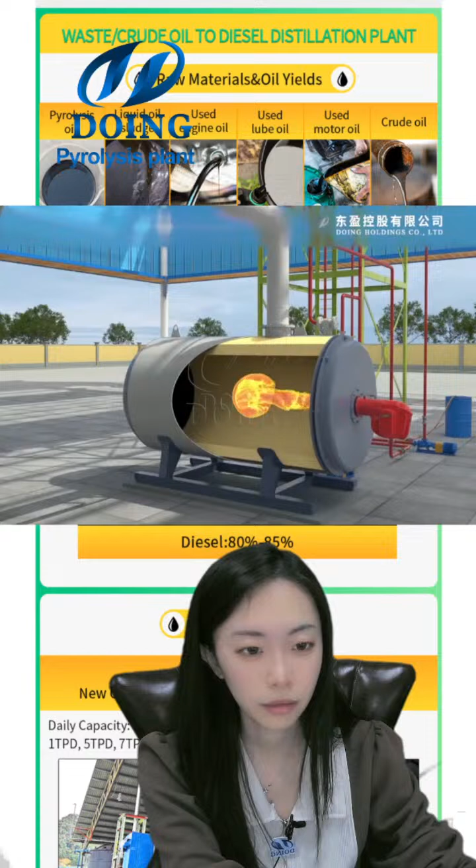The conduction oil furnace is equipped with a 400,000 calorie burner to heat the conduction oil. This is the circulating water system that will liquidize the oil. This is the reactor, equipped the same as the furnace with a 400,000 calorie burner and a tail gas burner. The gas will then come out.

The uncondensable gas will return to the furnace for heating. It will be used to heat the reactor.

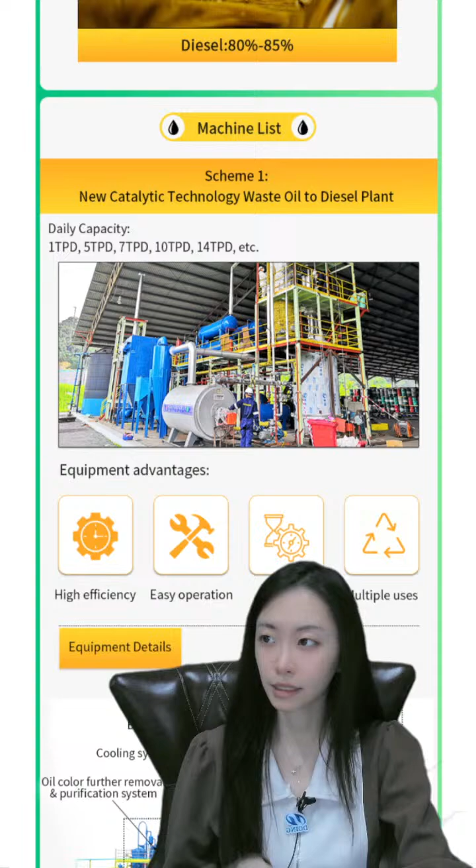We have two kinds of distillation technique. The first is the new catalytic technology waste oil to diesel plant. The second is the cost-effective waste oil distillation plant, which uses another technique. We'll show the differences between these later. The old one uses acid and alkali, and the new one uses catalytic technology. It's kind of different, we'll show you later. Now let's talk about a brief introduction to the distillation plant.

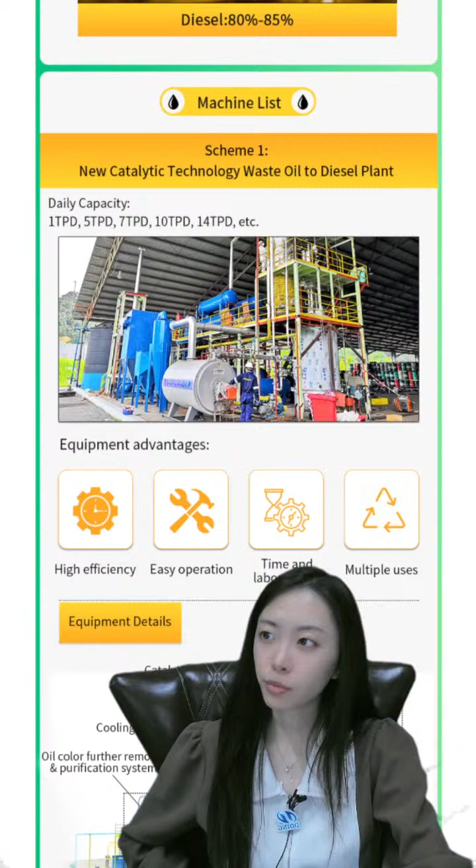We use high speed heating for the double heating system, so the heating time is about 20 minutes, giving high working efficiency. We also equipped it with a PLC system for automatic control. Because of different kinds of oil, you can use the same distillation plant.

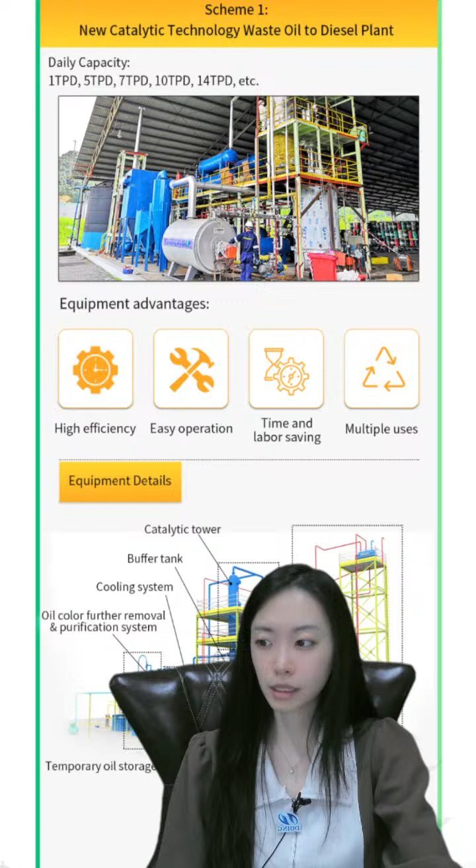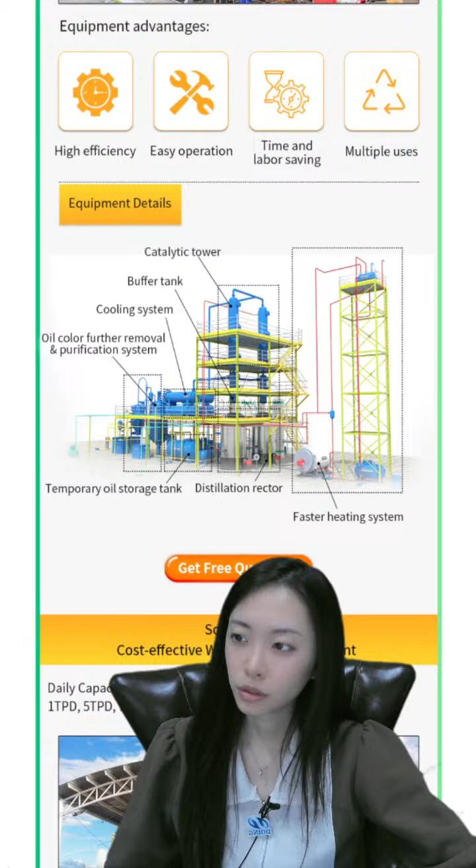This is the details of our technique, you can see the 3D layout. It includes the faster heating system, and we use conduction oil. Then there's the distillation reactor - we have two reactors to refine the diesel, then a buffer tank to slow down the speed, and a catalytic tower for the reaction. If you need a larger or smaller one, you can contact us.

We have different types. The smallest one is a frame type. It's very easy to install and doesn't need to be installed in your workshop - you can just transport it to the workshop and start the business right away. This one is cost-effective, easy to install, energy-saving, with frame construction.

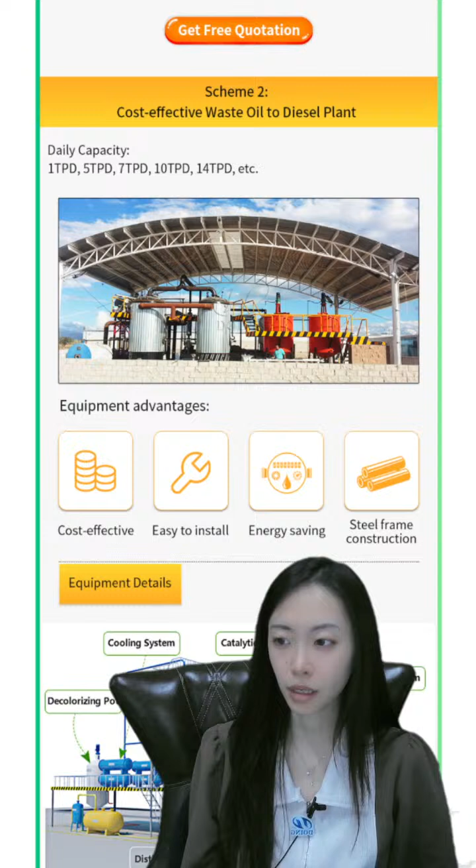We also use the catalytic, but the catalytic may be kind of expensive. So it just depends on your requirements, your materials, and the region where you start this business. We will suggest a different type for you. This is the details of the equipment, almost the same.

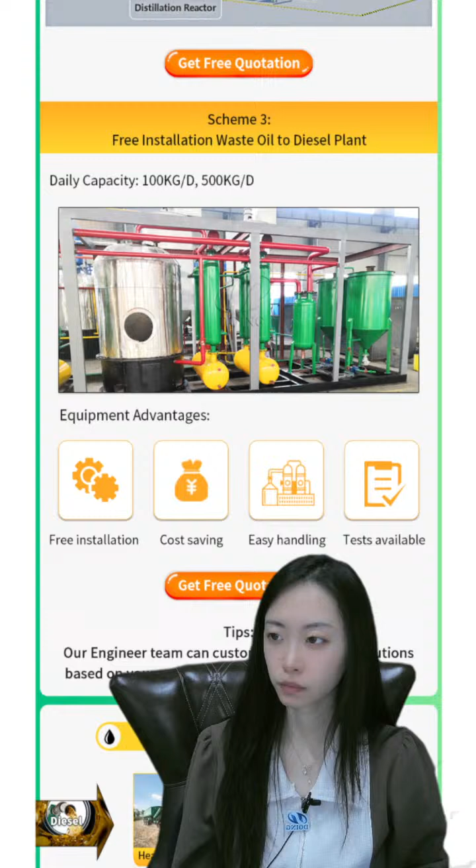And this is the third type. It's cost-saving, the cheapest equipment, and easy handling for testing available. So some experimenters or some colleges will buy this just to run experiments or tests on the oil.

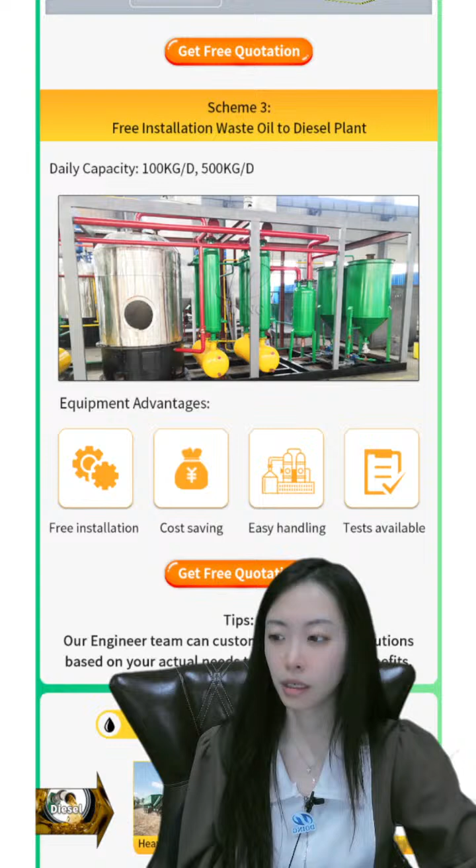So you can see this tip - our engineer team can customize a proper solution based on your actual needs to maximize the benefits of our equipment.

The main final product is diesel for heavy machinery, generators, boilers, and the second is asphalt for paving or refinery. Let's look at the profit analysis of the 5 ton per day waste oil to diesel plant.

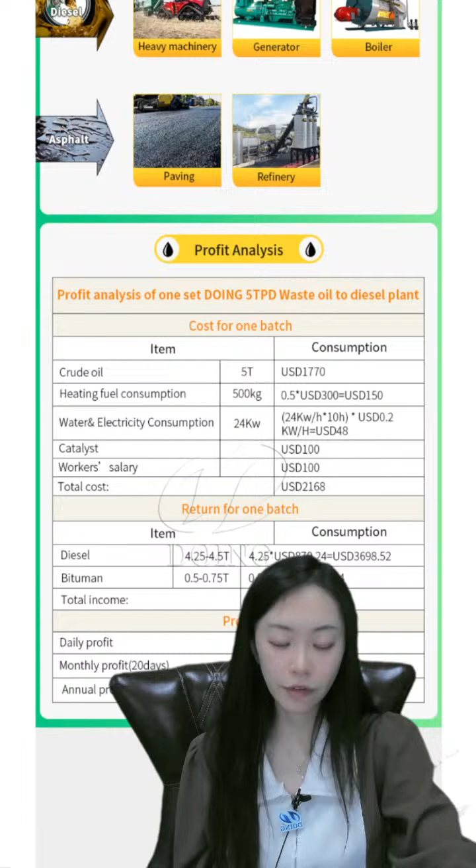This is just for reference, because we have different customers in different regions and the prices are different. We kept this to show you, so you can have a reference.

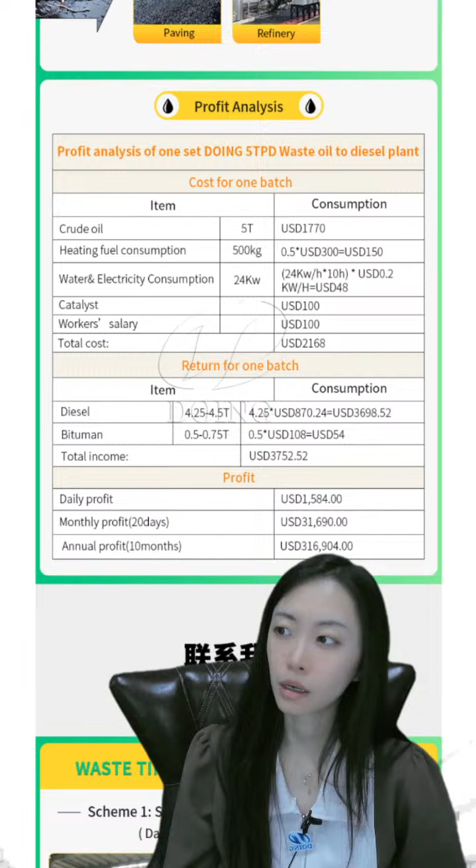The catalytic type is much more expensive, but you can buy it in the local market. This is a small scale distillation plant, scheme 1, the tire plastic plant and the distillation plant - we have 2 types for your requirements.

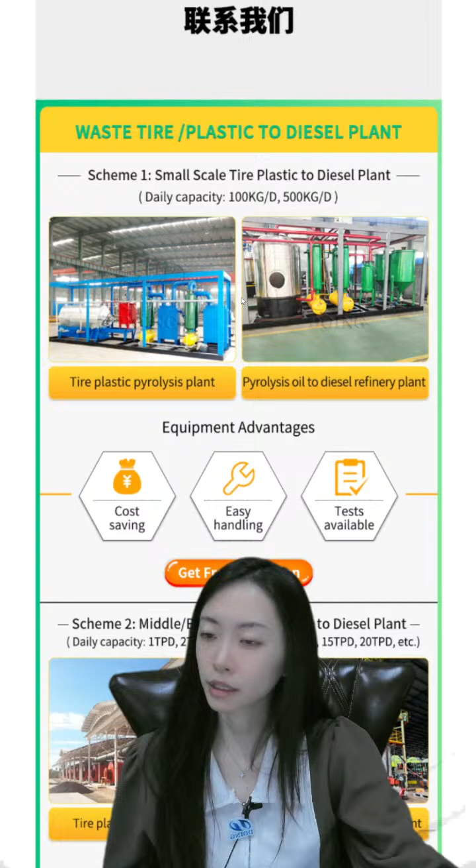This is a customer's plant that we delivered to England. We have customers in more than...

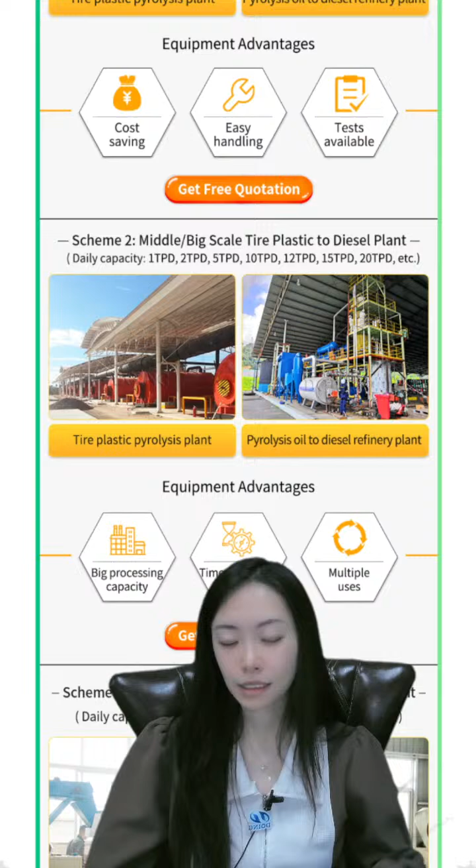This is a middle or big scale plastic to diesel plant. The daily capacity is 1 ton per day, 2 ton per day, 5 ton, 10 ton, 12 ton, 15 ton, and 20 ton. It has a big processing capacity, and is very time and labor saving with multiple uses.

By the way, we processed this plastic into plastic pyrolysis oil a few weeks ago, and there will be more maybe next week.

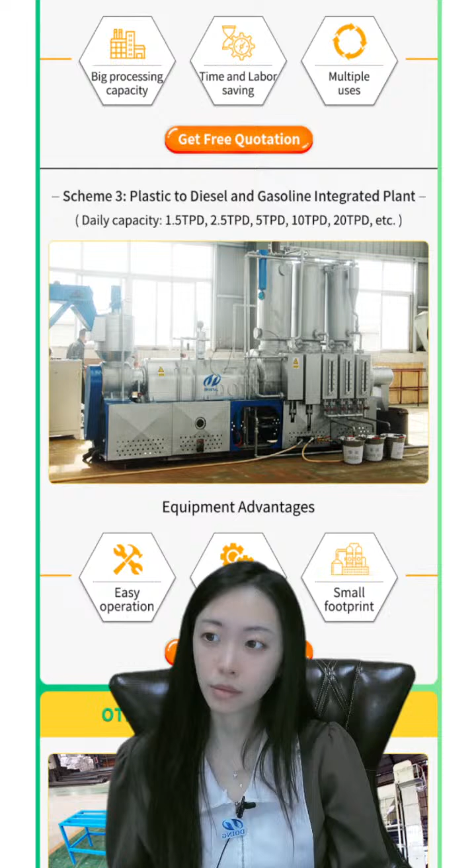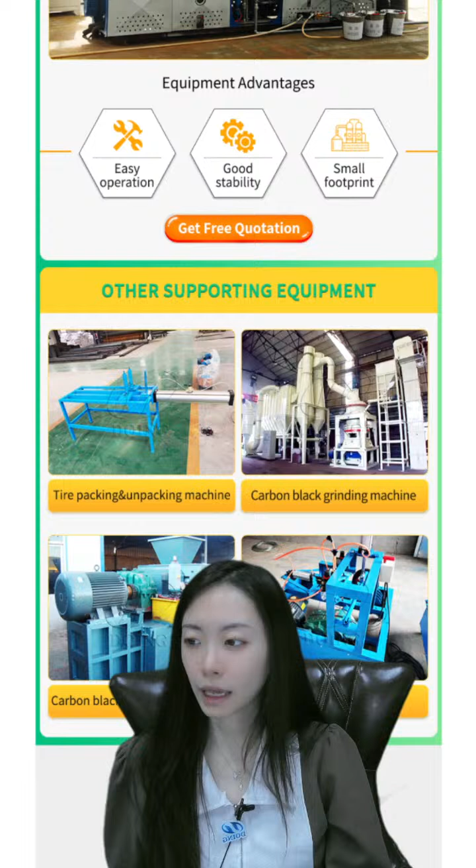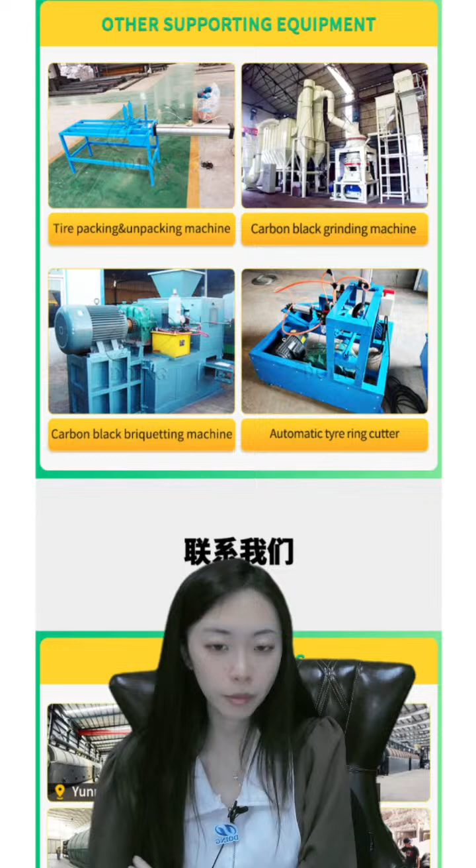The tire ring cutter first cuts the tire into small parts, small particles, and then we use a grinder to process them.

In Africa and abroad, in more than 90 countries we have our customers. So it's very convenient for you to visit our project cases and get a detailed understanding of this, to know how to control the type, our quality, our working efficiency, and so on.

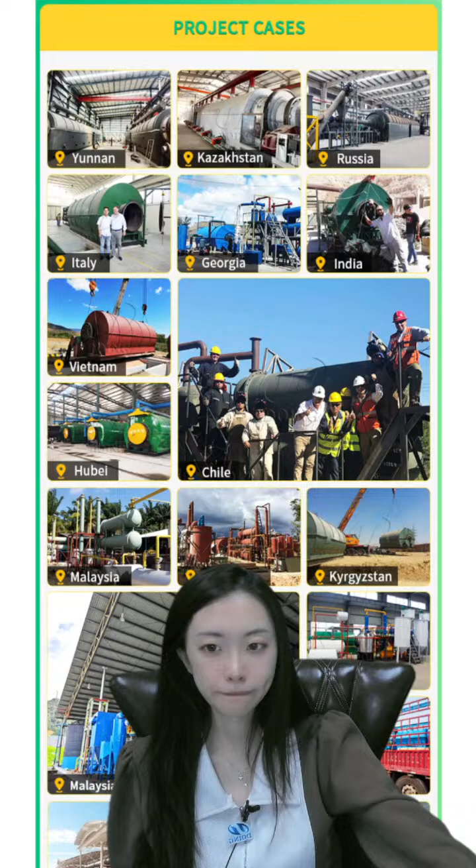Here is a customer feedback. A customer in India gave good feedback to our engineer, who was hardworking and completed the whole installation work in only 20 to 25 days - a successful implementation. And this is an American customer putting trust in our helpful, competent sales agent.

Okay, let's come to see the profile of our company. We are a comprehensive environmental equipment manufacturer, integrating technological design, research and development, machine production, sales, and after-sales service in one. We rely on excellent technology R&D strengths and innovation spirit. Our company has over 23 utility patents, and is honored as a National High Technology Enterprise by the Science and Technological Commission. Our main business covers solid waste and hazardous waste equipment, dealing with tire, plastic, oil, and sludge.

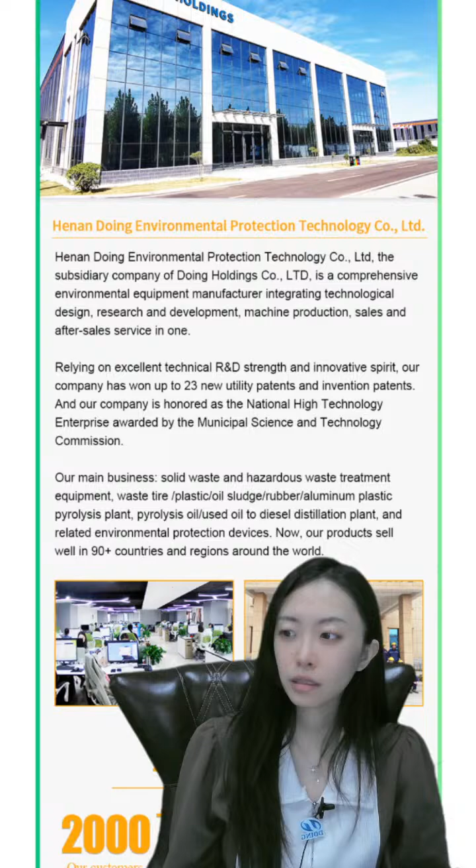Today we're going to share about waste tire to waste pyrolysis oil plant and pyrolysis equipment. Here is our service.

We have pre-sale service, on-sale service, and after-sale service in one. For pre-sale service, you can visit the factory production workshop for one-to-one equipment configuration planning, and visit the equipment placement site. You can directly gain knowledge of the detailed technique, and we often show our product cases to see the details of the production line.

On-sale service includes checking the production conditions of the machine and communicating the progress of equipment manufacturing. After-sale service includes a 1-year warranty and guidance for equipment installation and commissioning, along with final technical installation and working support.

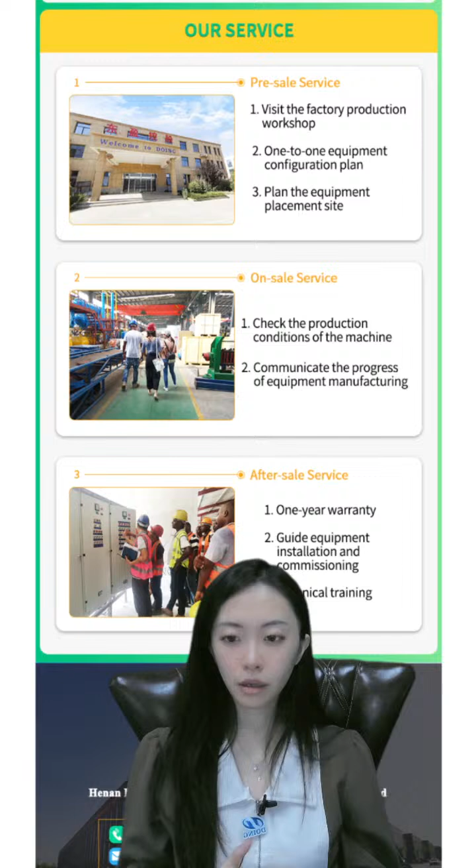Okay, let's see the differences between the different distillation machines. We have two types. This is the 3rd generation, the most common type now. The new design uses the catalytic tower design, while the old one uses acid and alkali. Let's look at the advantages and disadvantages.

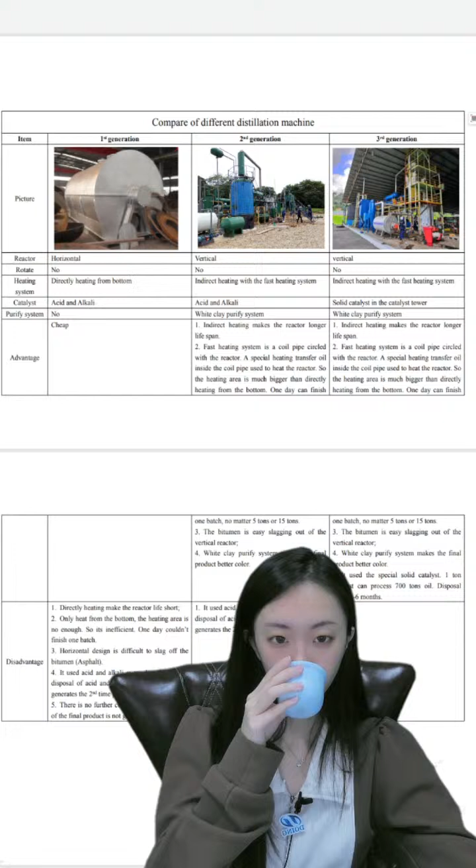The horizontal design is also difficult to slag off the bitumen, the asphalt - also called asphalt - so it's very difficult to clean. They use acid and alkali every day, so there is disposal of acid and alkali sludge daily, which generates second-time pollution. So we developed the second generation.

It uses vertical reactors, so indirect heating makes the reactor have a longer service life. The heating system is a coil pipe circulating around the reactor, bigger than direct heating from the bottom - this is why we use vertical reactors, not horizontal reactors.

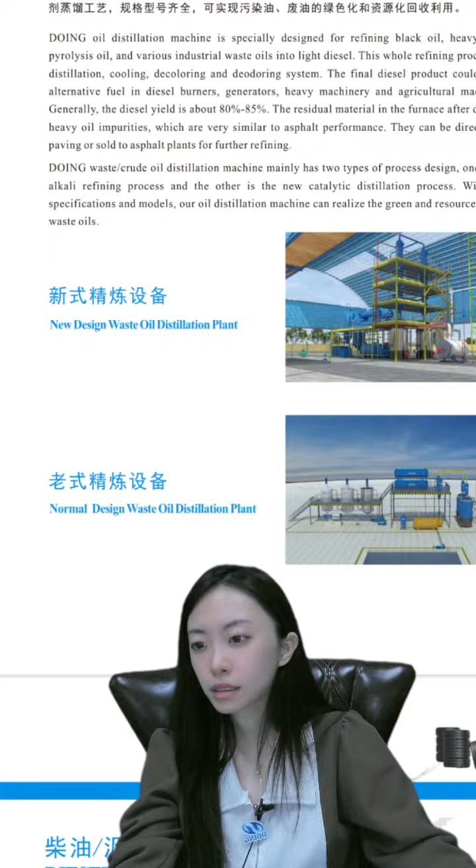Let's see about this. We can send this catalog to you, or give you the purification plant or the 3D layout, the layout of the reactor.

Here is the brief introduction of the distillation plant, a special design for refining black oil. This whole refining process includes distillation, decoloring, and the deodoring system.

The final diesel product could be used as alternative fuel in diesel burner generators, heavy machinery, and agricultural machinery, and so on.

Generally, the diesel yield is about 80 to 85%. Our distillation machine mainly has two types of processing design: one is the acid-alkali refining process, and another is the new catalytic, solid catalytic distillation process, which is much more

safe to have this production, and there is no second pollution during the production line. With a complete purification system, our distillation machine can realize the green and resource recycling.

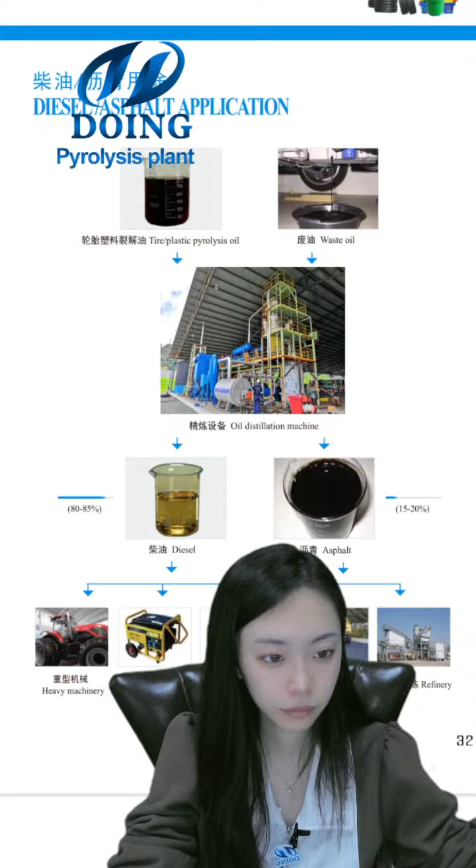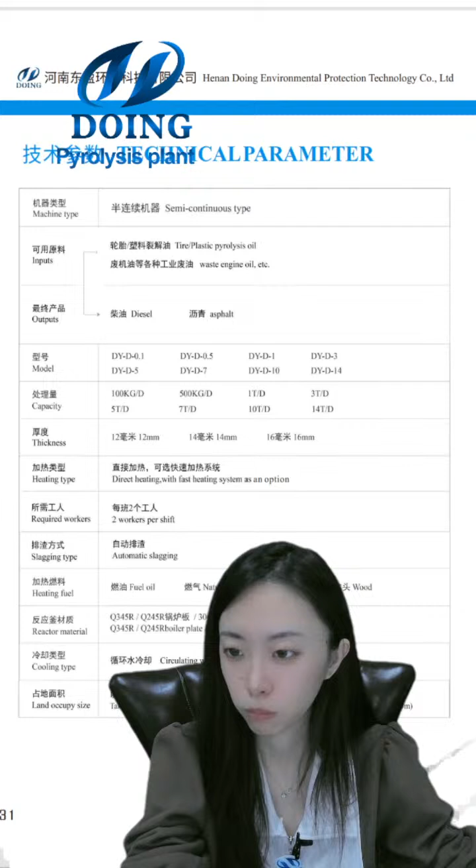This is the semi-continuous type, a smaller one, and it can be customized. The capacity is just the same as the model, and for heating type, we use direct heating with a fast heating system.

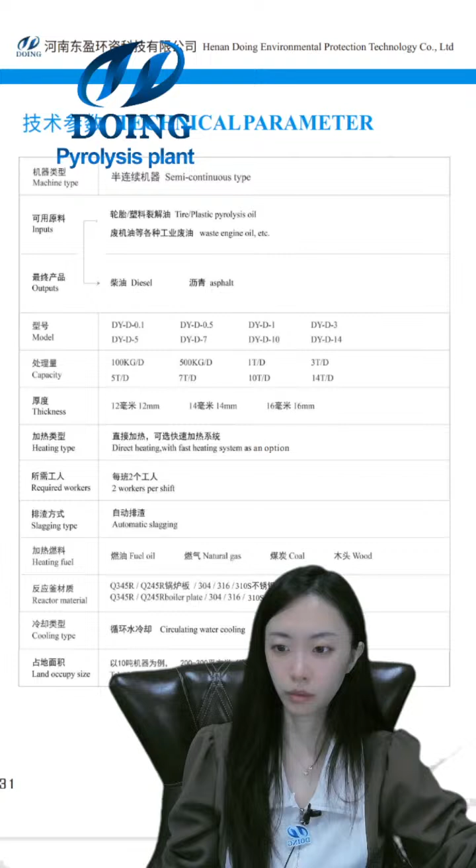This is an optional device, whether you use conduction oil or not. The heating flue can use natural gas, coal, or wood.

For land occupation size, it's maybe 200 to 300 square meters, with 10 to 15 rows and 20 to 25 lengths.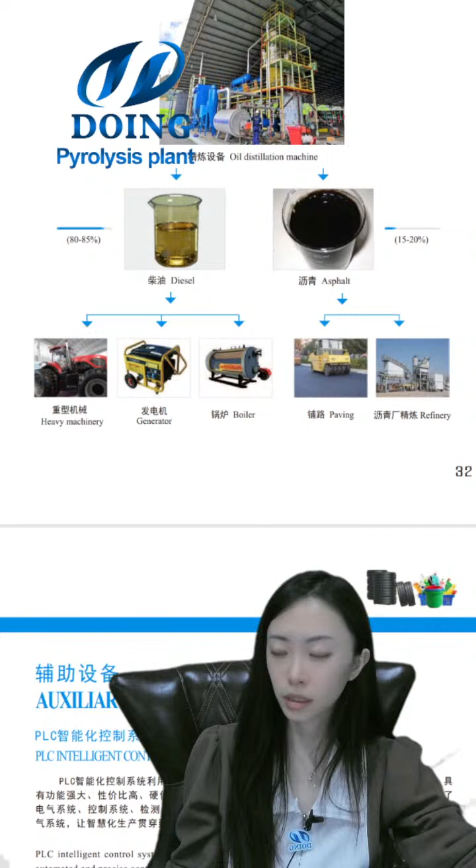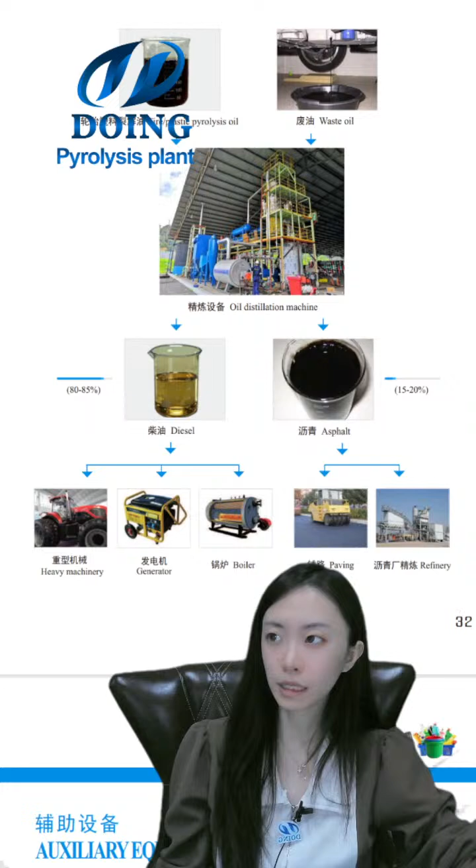This is the application of the diesel. We can use it in cars, but most of the waste oil quality can't reach the quality to use in cars.

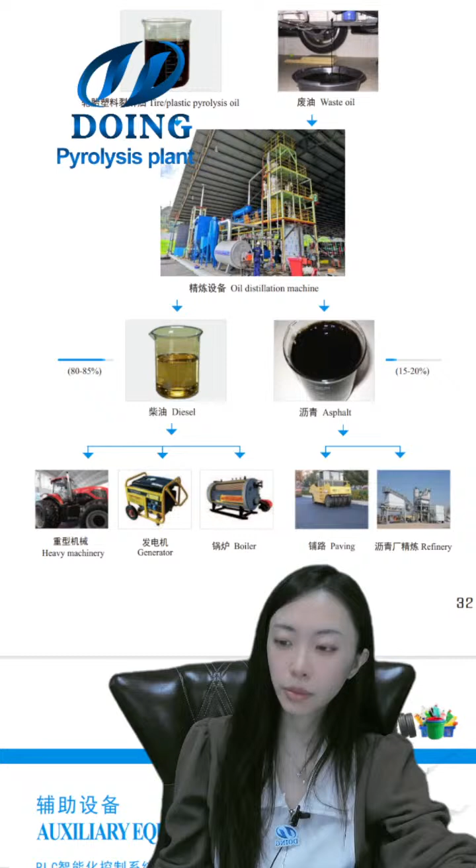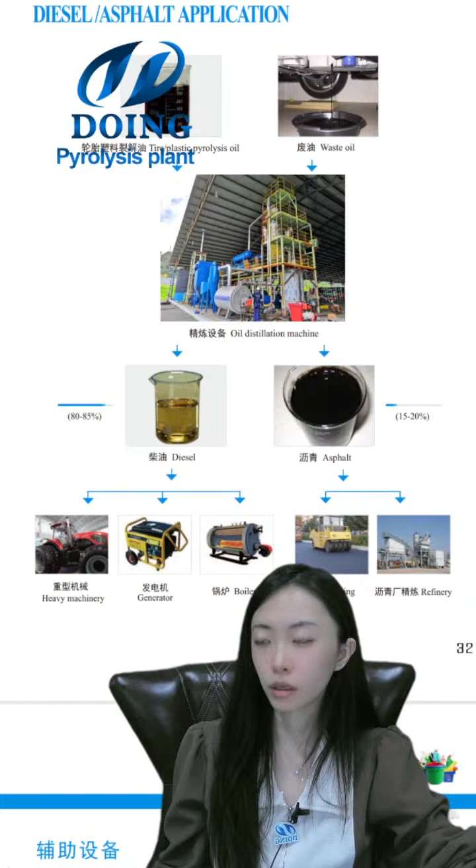And this is the distillation plant. We also have our pyrolysis plant to get.

For the pyrolysis plant, we have three types. The batch type pyrolysis plant.

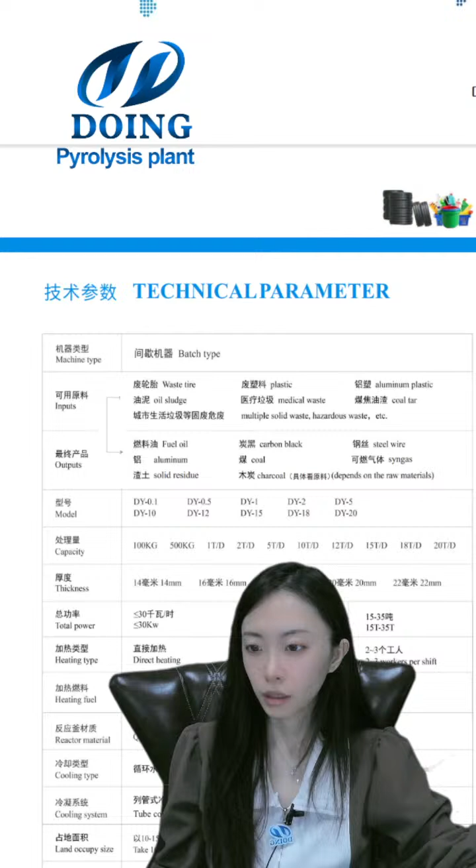This is the batch type pyrolysis plant. We have three types of pyrolysis systems.

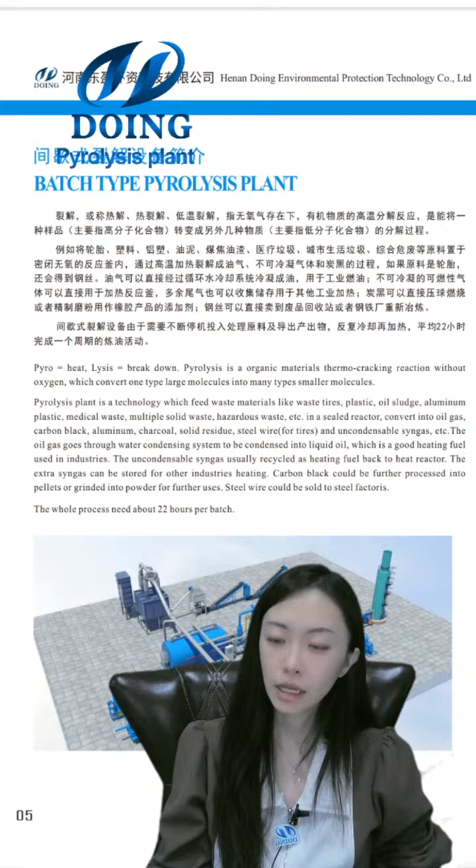The batch type is one batch per day, and the second one is the semi-continuous pyrolysis plant, which has 3 batches for 2 days, for different raw materials, different requirements, and different capacity.

The fully continuous one is the highest, more larger, and can process more raw materials every day. The biggest capacity is just 50 tons per day.

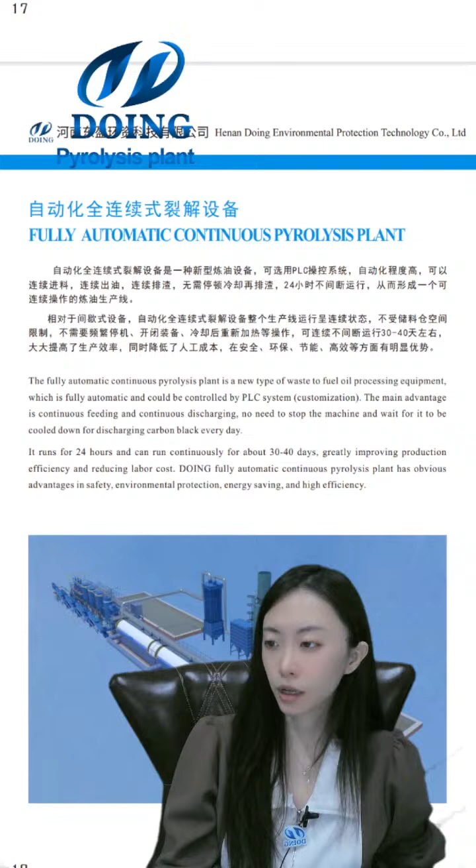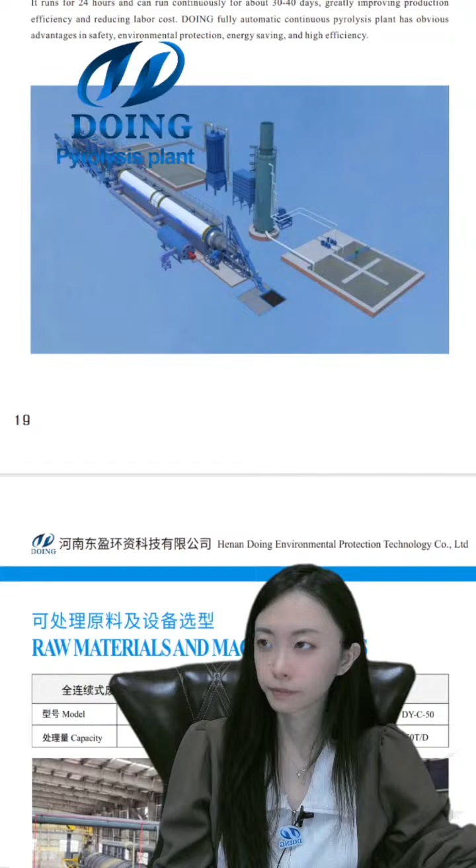Okay, and let's see the 3D video of the pyrolysis plant and the distillation plant.

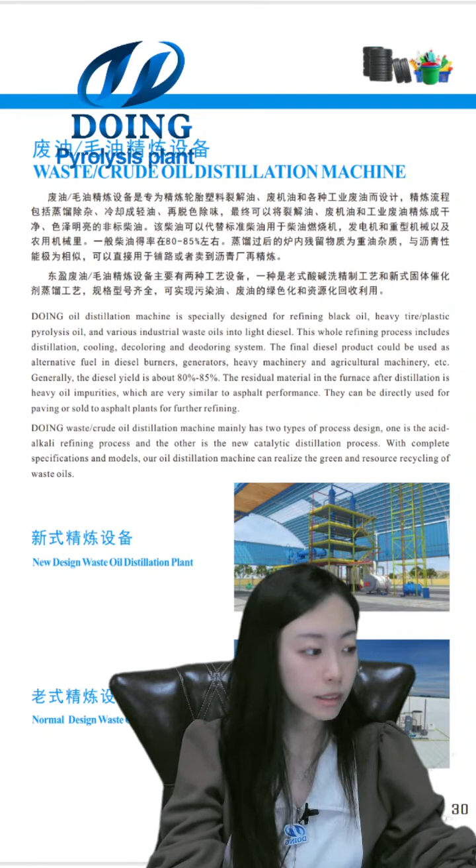Okay, here is the distillation plant 3D video, very beginning.

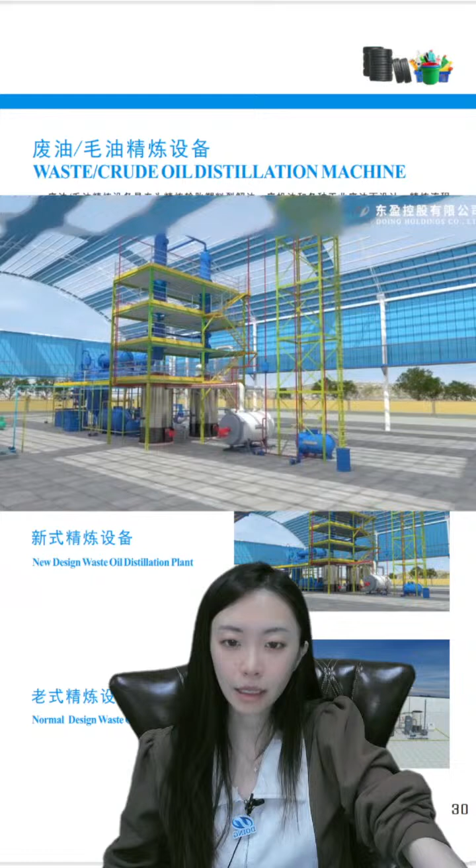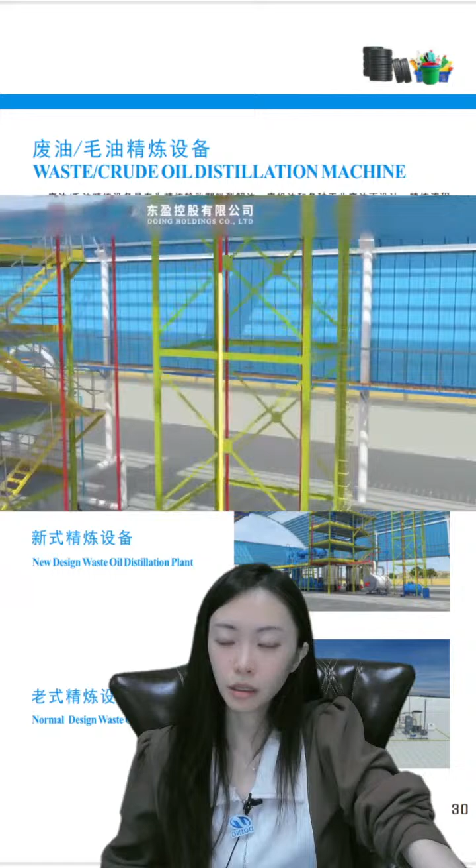The new distillation plant uses a catalytic process, and we will use the double heating system. The heating time is about 20 hours. The fast heating system can save nearly 10 hours by using this conduction oil.

This just goes through the high tank, while the high tank is used to give the oil impulse that can first go to the whole production line.

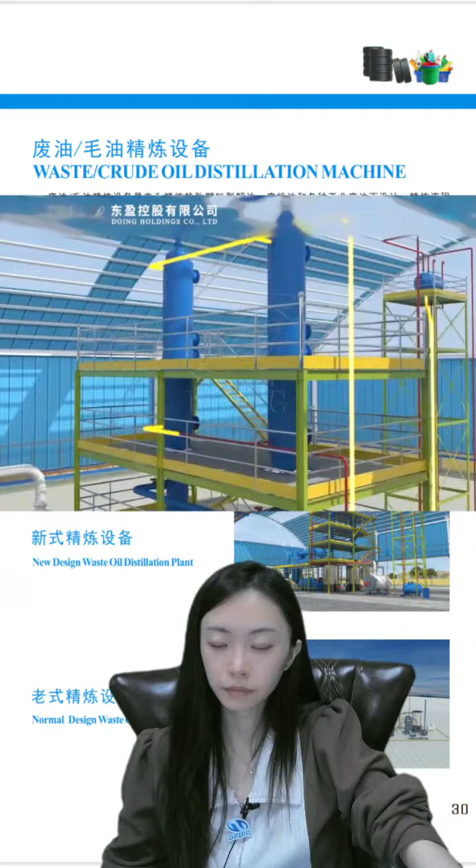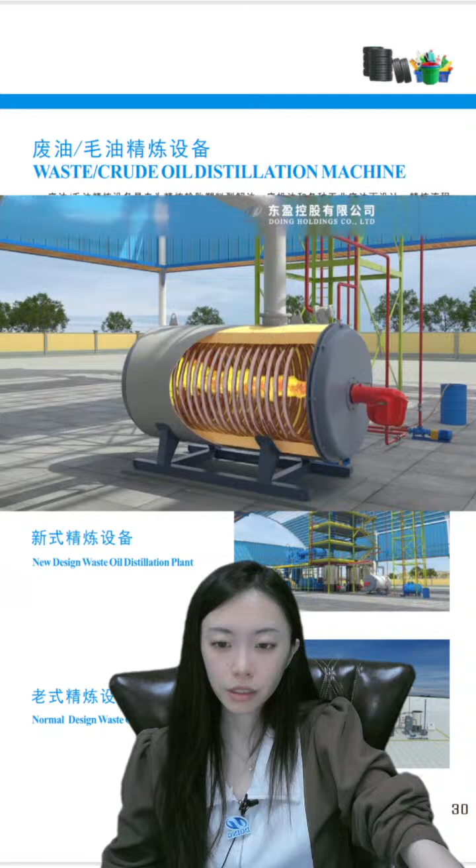The conduction oil will first reach the reactor. This is the conduction oil furnace to heat the conduction oil heating cooling system, so there is no water pollution during our production. All the water is circulated to liquidize the gas, to liquidize the fuel into diesel.

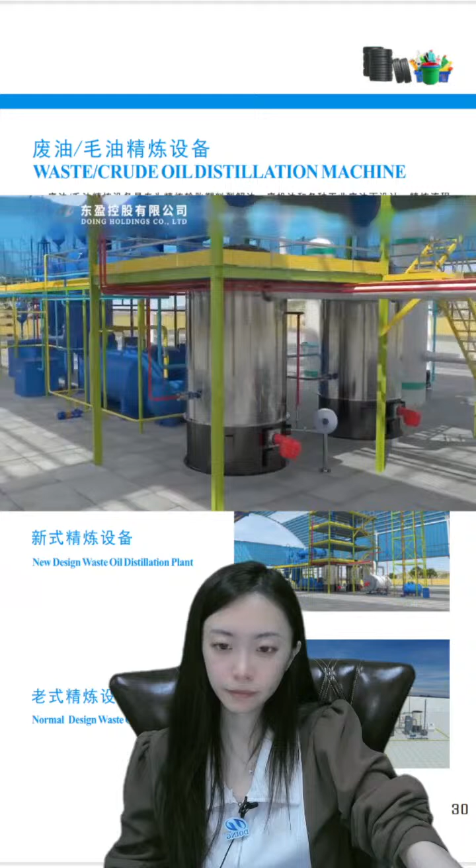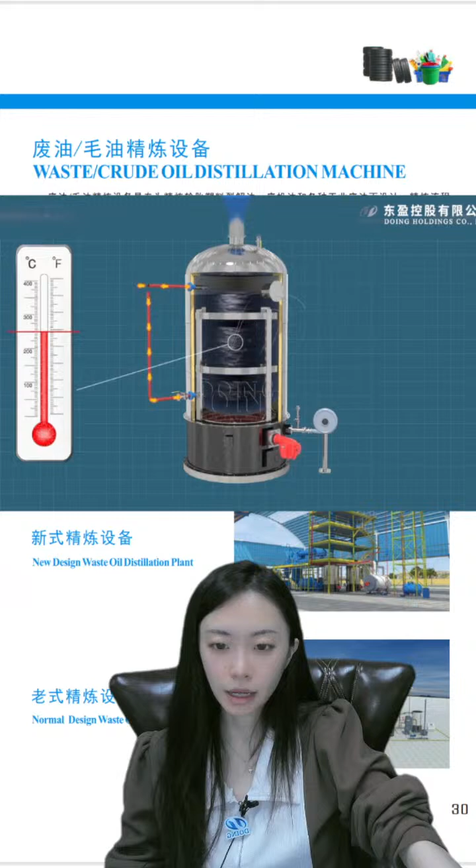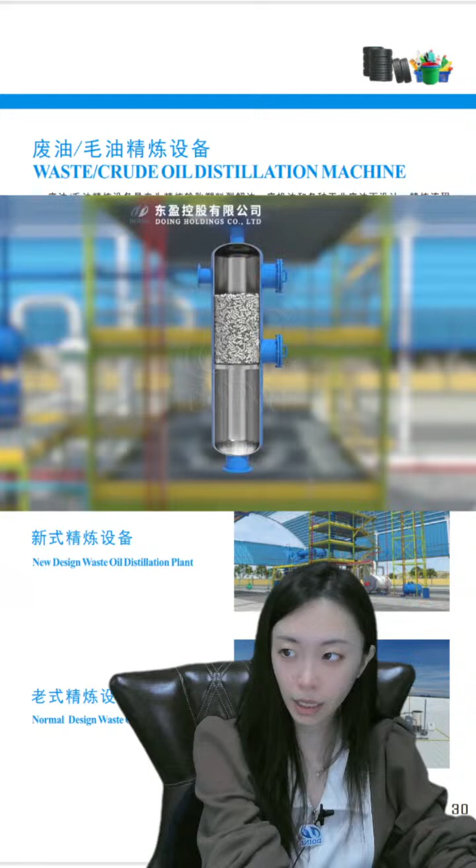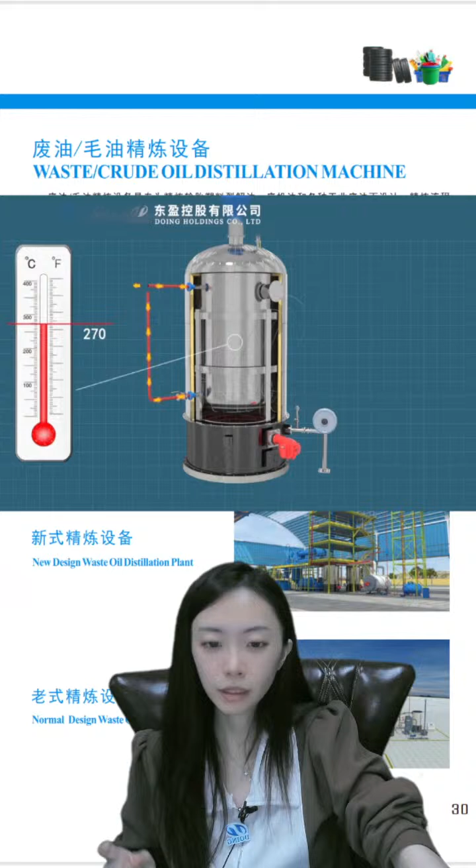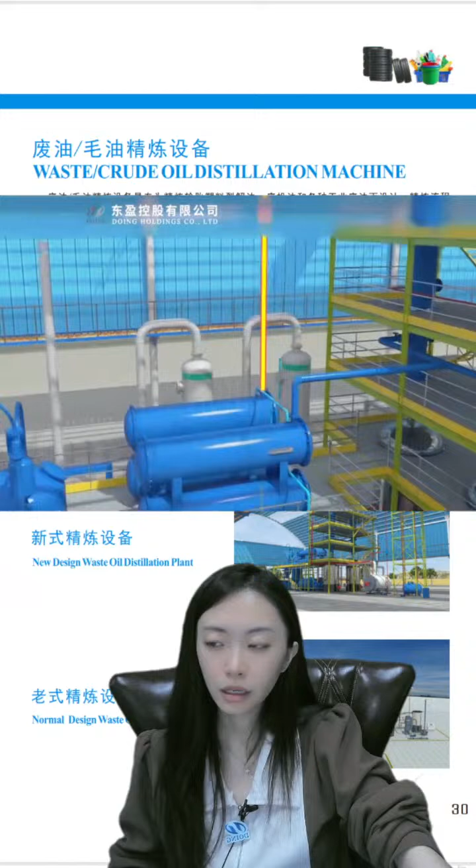As the temperature rises gradually, gas begins to produce, and this is the diesel, the non-standard diesel. In order to protect the catalyst, we designed it so that the gas from the previous section will not enter the catalytic tower, which is controlled by a valve.

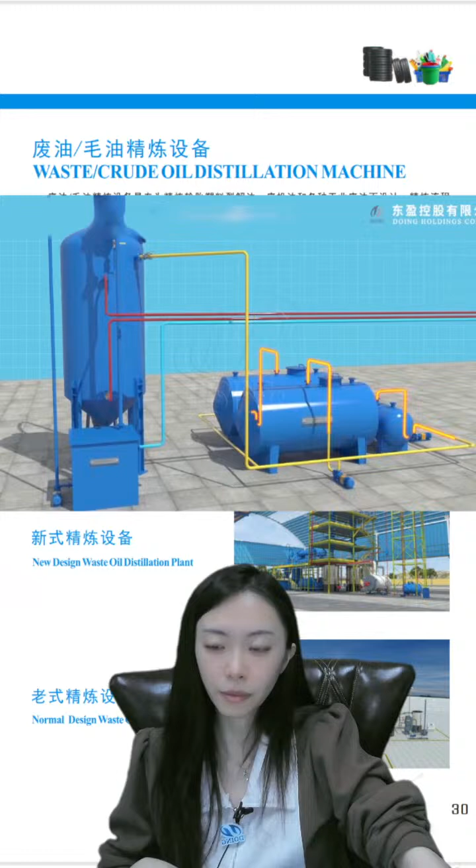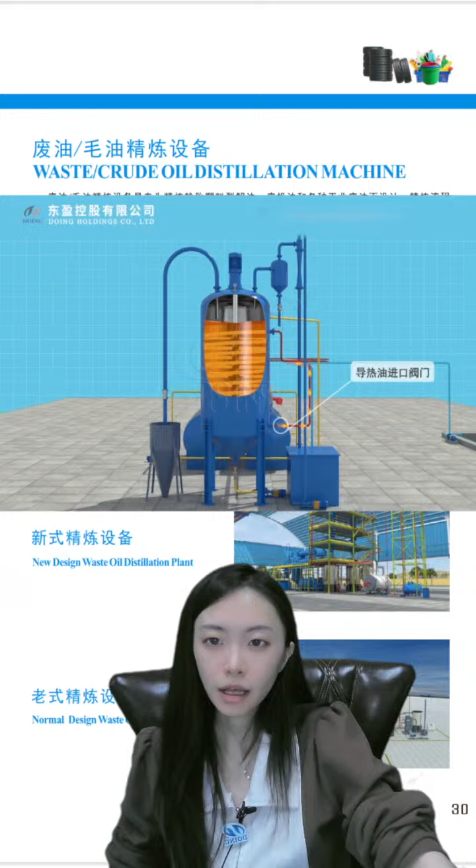This is the diesel, but standards differ by market. It may be strict in America and Europe, but maybe in Africa or other continents it's not as strict. I can ask our sales manager to clarify more about different markets and regions, since they have different policies regarding this.

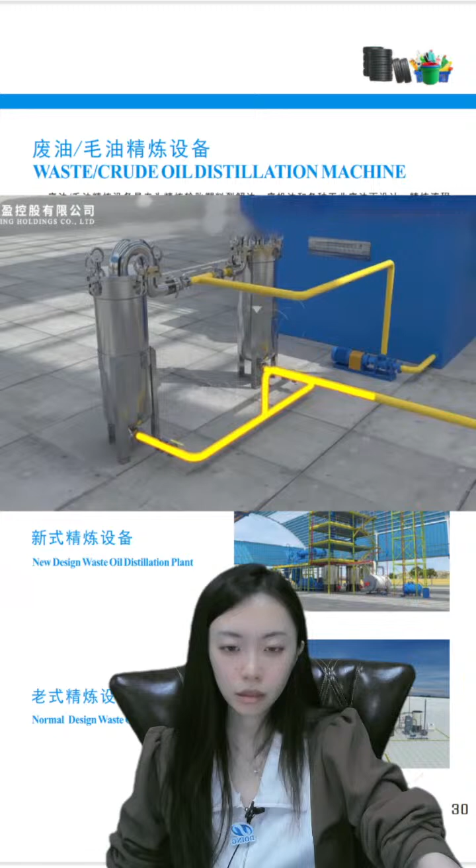This is the purification system, an optional device that uses white clay, and we also equip it with different purification systems to reach the different standards of different regions, ensuring no pollution from this production.

In different regions, like different provinces in China, there are different policies, so we need to equip it with different purification systems, like different desulfurization towers.

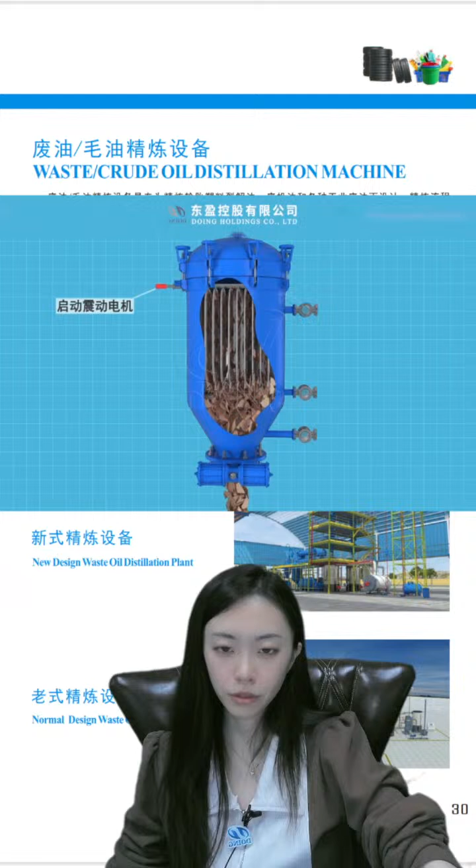This is the blade filter that removes the white clay. After production, we need to clean the white clay using this system.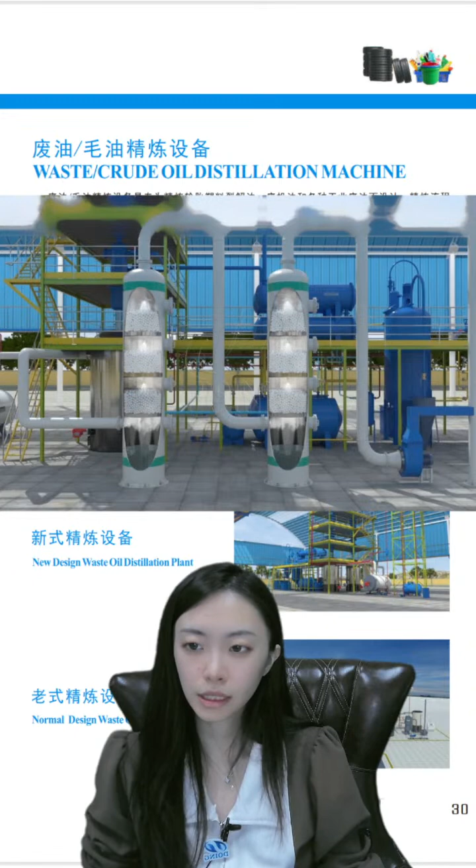Here is the distillation plant. Let's see the differences between the new techniques. We have 3 generations, but now we only offer the second and third generations. This one uses acid and alkali, and this one uses solid catalytic, which is more environmentally friendly and more high efficiency.

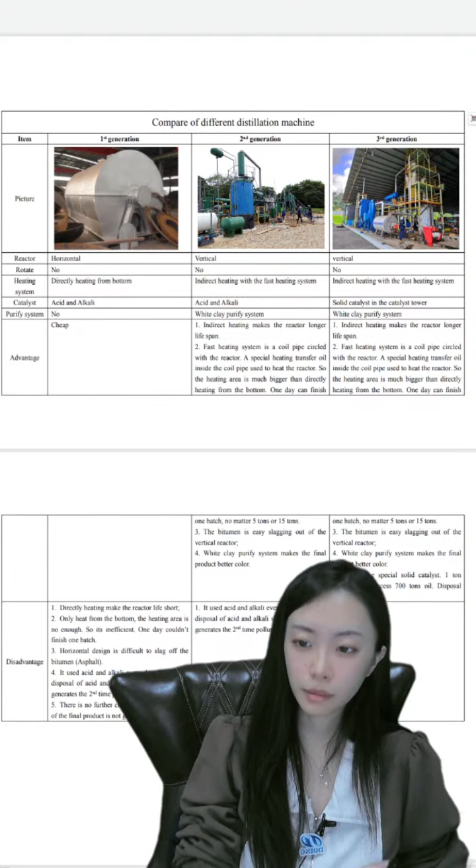You can also send your raw material to our factory. We have a free service to test your materials and check whether the quality of the final products reaches the standard, including the distillation rate, oil yield, and so on.

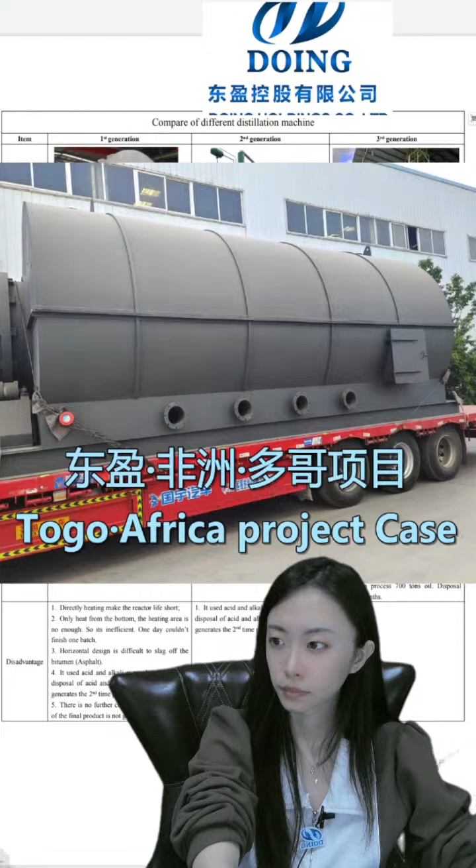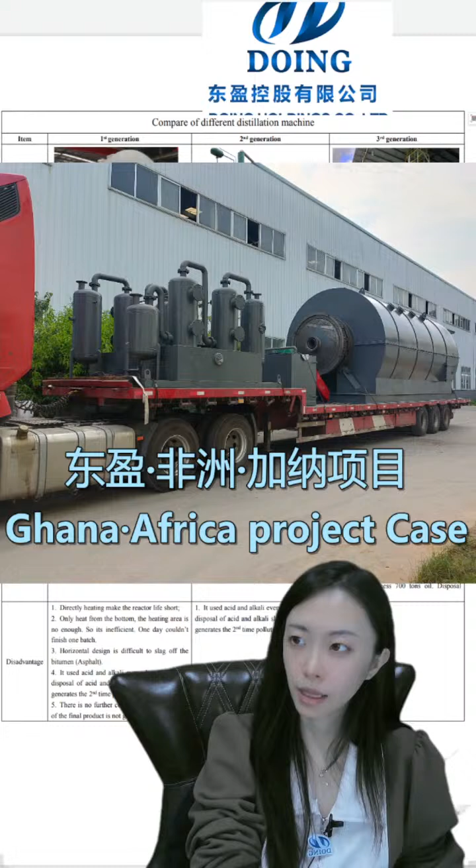Our company was set up in 2011, and in the very beginning most of our customers were from Africa. Here's Nigeria, where we have our subsidiary company.